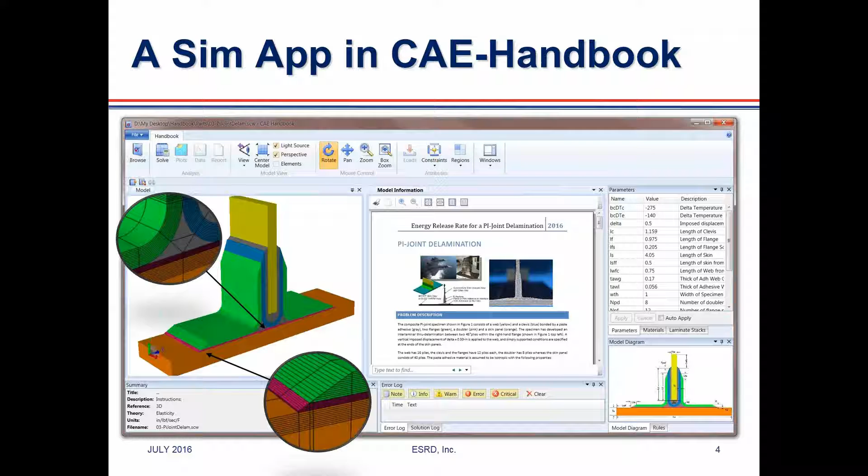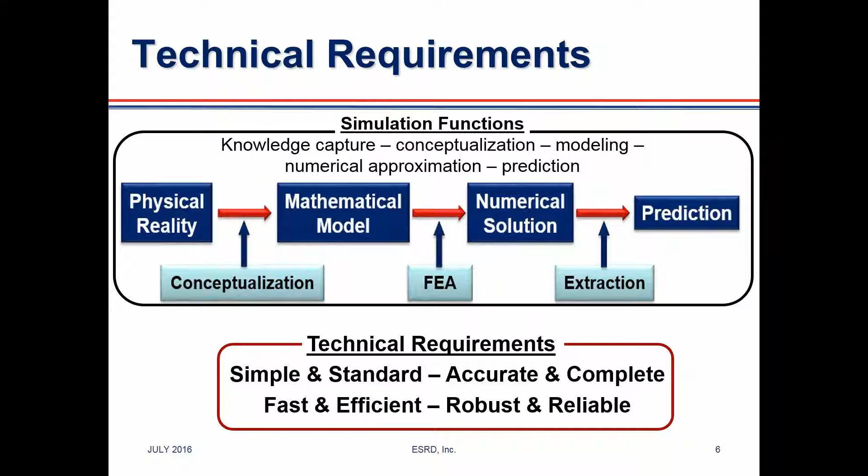This is the foundation, this is the basis of the simulation function, and the technical requirements within the simulation function for simulation apps are that they have to be simple, standard, accurate and complete, fast and efficient, robust and reliable, as we will see in a moment.

Before I can get into those details, I'd like to introduce the definition of simulation governance, which is the exercise of command and control over all aspects of numerical simulation. In short, what we mean is that the procedures of simulation governance include the proper formulation of mathematical models, the adoption of the best available simulation technologies, and, very importantly, data and solution verification. The goal is to enhance and ensure the reliability of prediction based on numerical simulation.

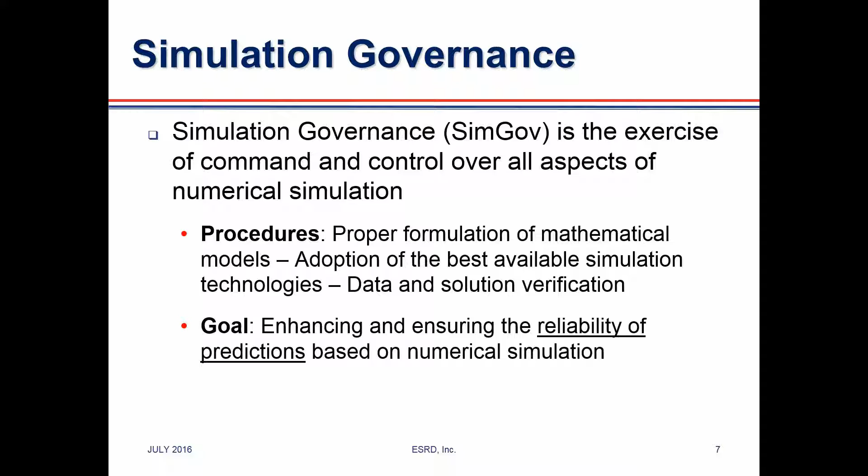It's always expected that when a result of numerical simulation is produced, the reliability should go hand in hand, and that has to be guaranteed by the procedure. In other words, to ensure the level of reliability needed for professional use, simulation apps must incorporate a posteriori estimation of relative error. This is also known as solution verification, which is an essential technical requirement of simulation governance, and we will elaborate a little bit on that shortly.

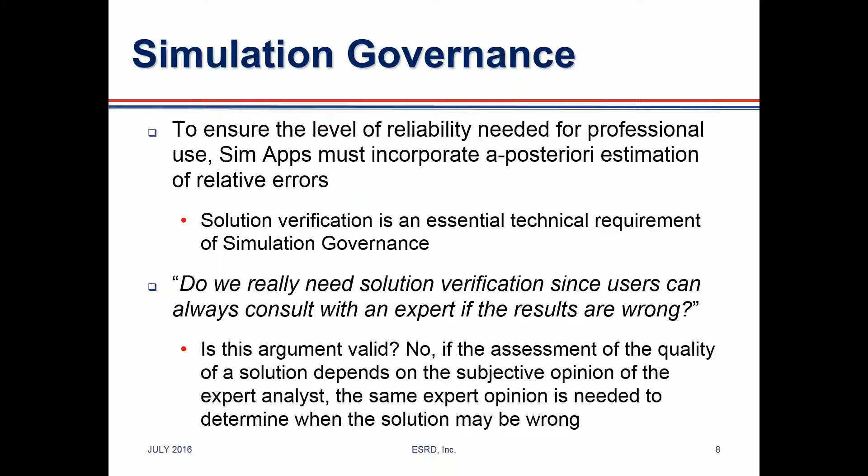Do we really need solution verification, since users can always consult with an expert if the results are wrong? This is a fair question to ask. Is this argument valid? And the answer is no, for the following. If the assessment of the quality of a solution depends on the subjective opinion of the expert analyst, the same expert opinion is needed to determine when the solution may be wrong. The user may not be qualified to make that determination. For that reason, we have to have very strict technical requirements for the development and deployment of smart simulation apps, as we will see now.

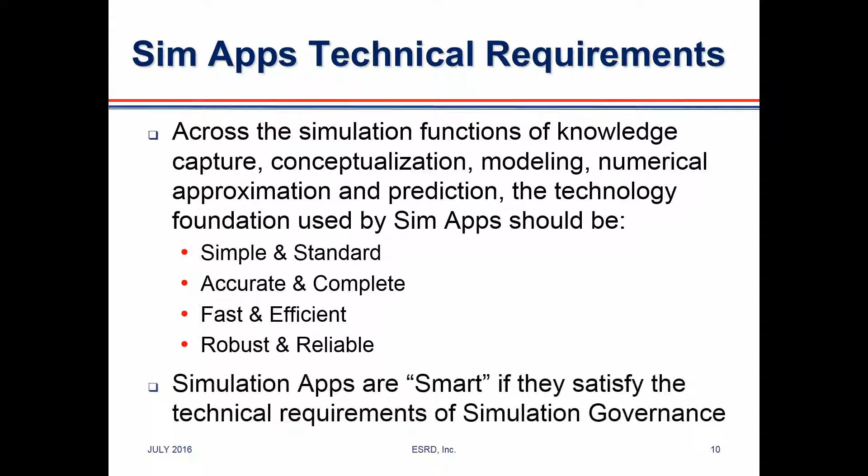Simulation apps: we reviewed the simulation functions, knowledge capture, conceptualization, modeling, numerical approximation, and prediction. This requires that the technology foundation used for simulation apps should be simple and standard, accurate and complete, fast and efficient, robust and reliable. And simulation apps are smart if they satisfy the technical requirements of simulation governance. And we introduced already the concept. Let's now review these technical requirements.

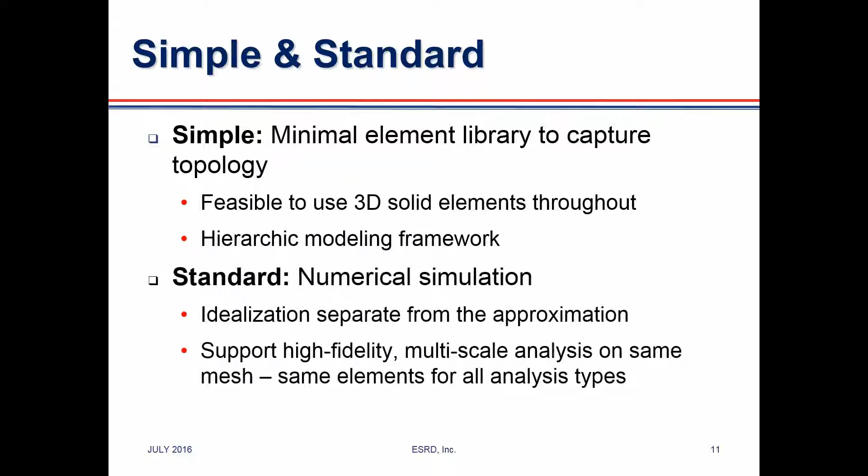By simple, we mean that the supporting technology should provide a minimal element library to capture topology, where it should be feasible to use three-dimensional solid elements throughout, and it should provide a hierarchic modeling framework that facilitates the deployment of these applications. Standard in that we should apply the principles of numerical simulation only, in which the idealization is separate from the approximation, and it must support high fidelity multi-scale analysis on the same mesh. That means that the same element can be used for all analysis types.

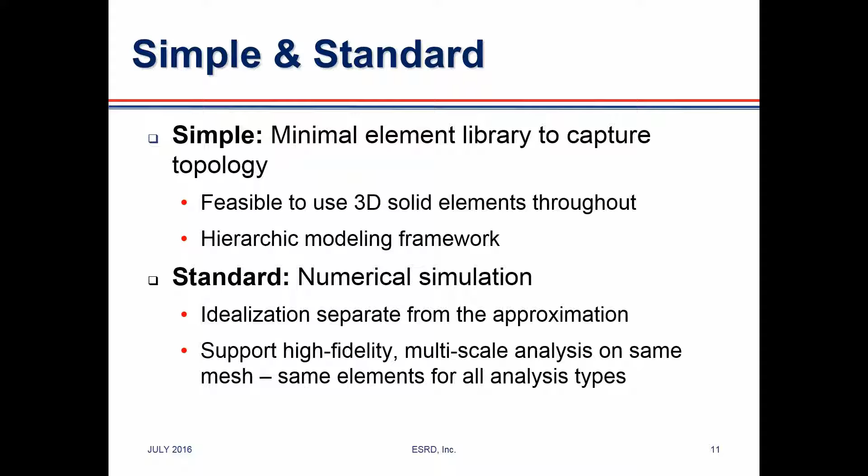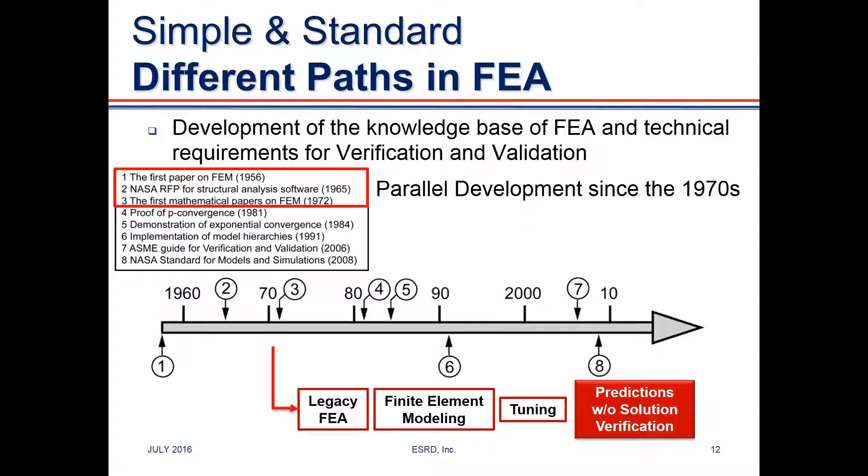The first mathematical papers on the finite element method appeared in the early 1970s. That is what we refer to as the parallel developments in the 1970s. Legacy finite element analysis was introduced in the early 70s. The concept of finite element modeling was introduced. Tuning was considered to be a proper approach to overcome the difficulties associated with the utilization of the finite element method, and predictions were produced without a posteriori solution verification. Basically, this established a process by which only experts can operate in this modality.

A later development, if you look at the timeline on the left, the proof of p-convergence was produced in 1981, and demonstration of the exponential rate of convergence appeared in 1984. So that's why the track of numerical simulation, the proper procedure of numerical simulation, can be traced to around the late 1980s.

That numerical simulation, also from the work done in the 1990s with implementation of model hierarchies, is what is indicated here with hierarchic spaces and hierarchic models, which is the foundation for this numerical simulation approach. And the outcome of that is that the prediction occurred with solution verification.

And this solution verification became really important together with the validation in the early 2000s, and the ASME produced a guide for verification and validation procedures in 2006, and NASA produced some standard for model and simulation in 2008. So when we refer to numerical simulation, we refer to the green track, not to the red track.

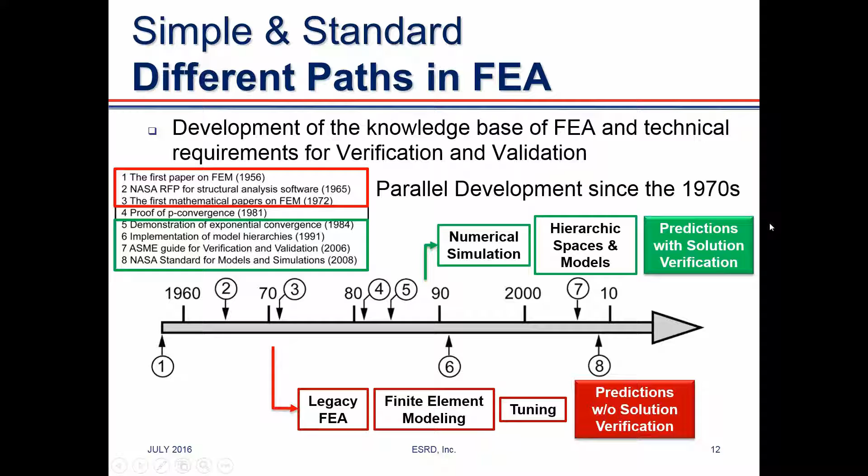Accuracy and completeness means accurate numerical simulation has to be accompanied always with solution verification. Otherwise, the deployment of such application is very dangerous. And that means objective measure of the solution quality every time, not as an a priori activity, but as an a posteriori activity. Every time a solution is produced, there has to be an objective measure of the quality of

the approximation. Feedback when the answer exceeds rules or is wrong, and high resolution results should be possible for low density meshes, so the user, who may not be an expert in finite elements, can rely on the results obtained from the application.

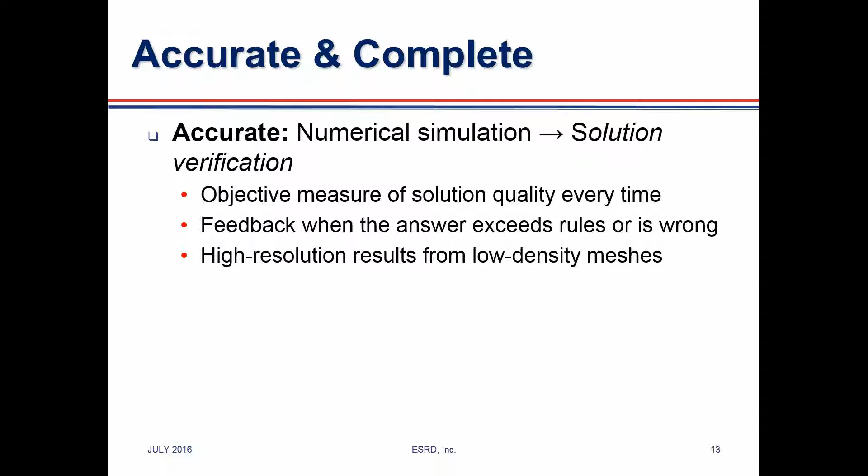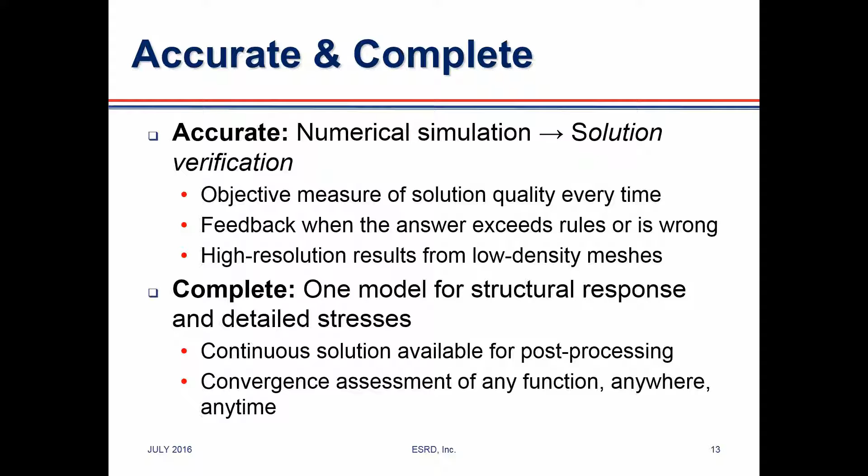Complete in the sense that one model should be enough for a structural response and detailed stress analysis, with continuous solutions available for post-processing, and with convergence assessments of any function, anywhere, and anytime.

In order to illustrate that idea, consider this very simple problem, which is a contact problem, in which a large clevis is contained within a housing of an aircraft, and in this particular case, the goal was to assess the effect of rework on the lip of the housing to determine the influence on the maximum stress that was the characterizing parameter for the fatigue life of the component.

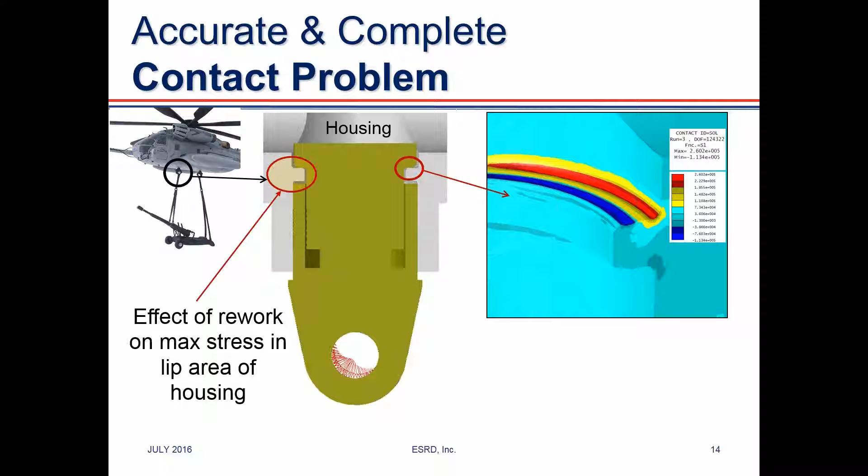Corrosion was detected in this component, and before the repair was initiated, it was decided to do an analysis to verify that after removing the corroded material, the component can take the load and have the proper fatigue life. What you see on the right is a typical finite element analysis result. It is a contour plot with the stress, and what I'm showing here is the mesh that was used in this case.

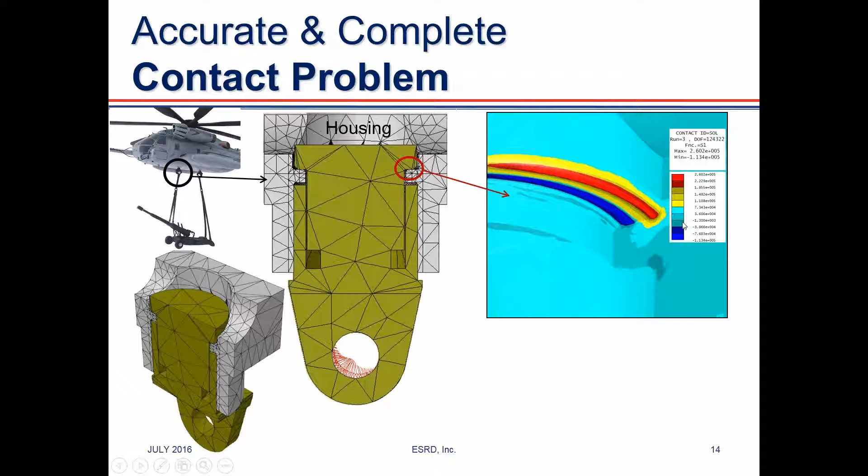On the left corner, you see a three-dimensional cut, and only the symmetric part is shown. The question here is, is this mesh good enough to produce this result? And the answer to that is simply yes, if you have the ability to demonstrate that the quantity of interest, in this case the first principal stress which drives the fatigue life, has converged.

That means as the number of degrees of freedom was increased on a fixed mesh, the results of the analysis show that the first principal stress is convergent to a limit value. And that's what we mean by high resolution results for low density meshes.

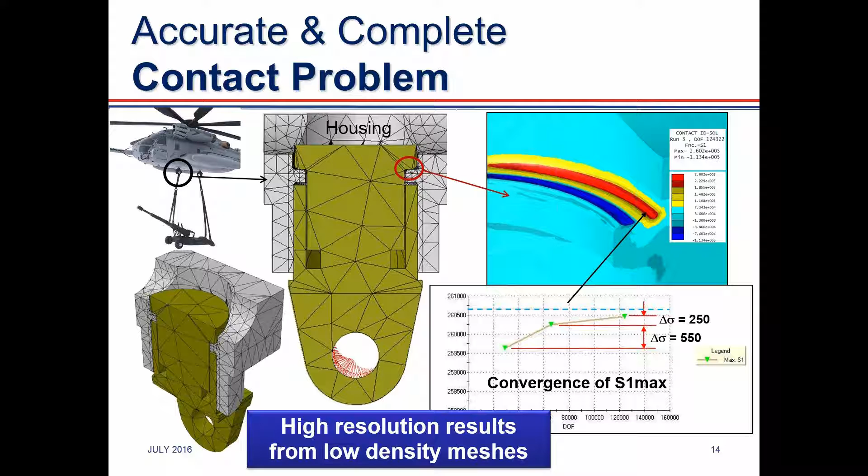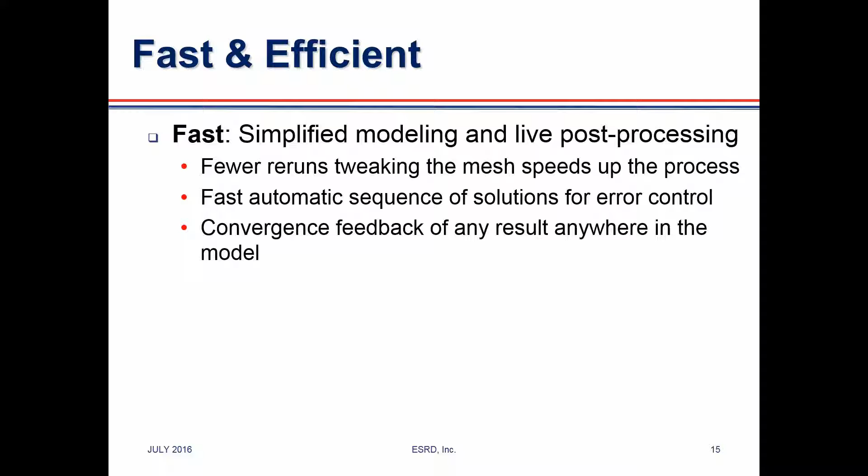That means that once the model is ready to be solved, the computer takes over and the sequence of solutions is produced automatically. This is a fast process, and convergence feedback for any result anywhere in the model can be easily obtained.

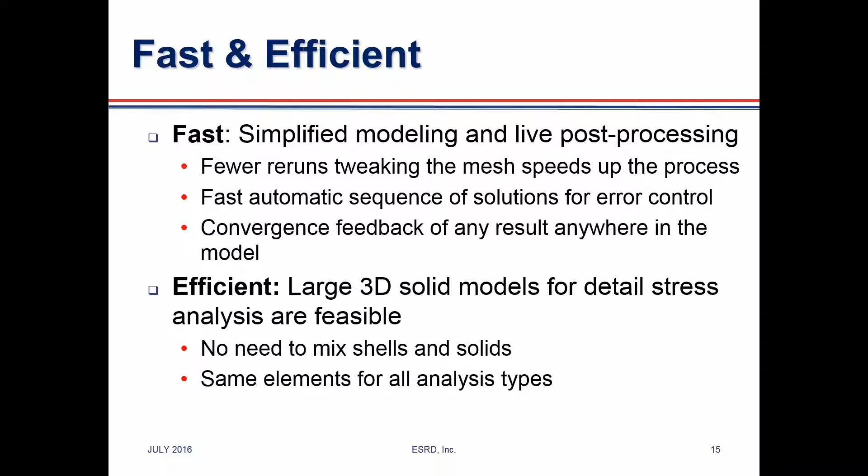Efficient means that large 3D solid models for detailed stress analysis are feasible. No need to mix shell and solid. This is a very common practice in large structural components, but also one that requires a lot of expertise to understand and get it correctly. And same elements, as we mentioned, for any analysis type also contribute to the efficiency of the process.

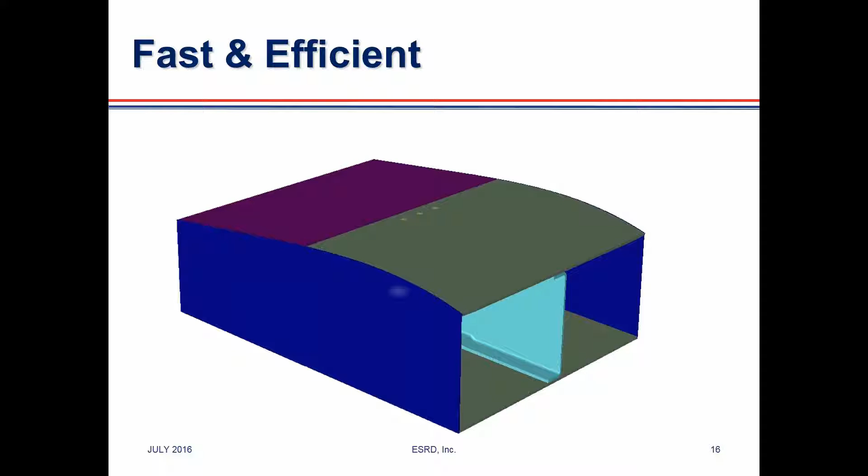What you see here is a typical section of a portion of a wing, and if we look inside at some of the details, one of the problems with this type of structure is the scale issue. You see structural elements that are relatively large and small elements such as fasteners, holes, and when you also want to include the clearance, which is a fraction of the size of the hole, then you can see immediately the scale problem. So how can a model like this be properly analyzed?

On the back side, you see the rib. In this case, the upper skin and the lower skin are bonded to the flange.

This rib is connected to the main spar by means of fasteners that connect the top and bottom skins to the flange of the spar, and by a shear clip that connects the web of the spar to the structure in the back by means of fasteners. There are 5 fasteners on the shear clip, and there are 3 in this case for this detail, 3 fasteners connecting to the main spar. And the similar situation occurs in the front.

One of the complexities of this problem, or the reason we had to develop this particular application, was that engineers wanted to know what is the efficiency of the shear clip in transferring the shear, because the dimensions of these components were such that the traditional calculations were not capable of determining how effective the shear clip was in transferring the shear. And what we were able to demonstrate is that by just changing the level of interference or clearance of the fastener, the shear clip could take from almost the full load to no load at all, which was a big help for the engineers having to make this design decision on this component.

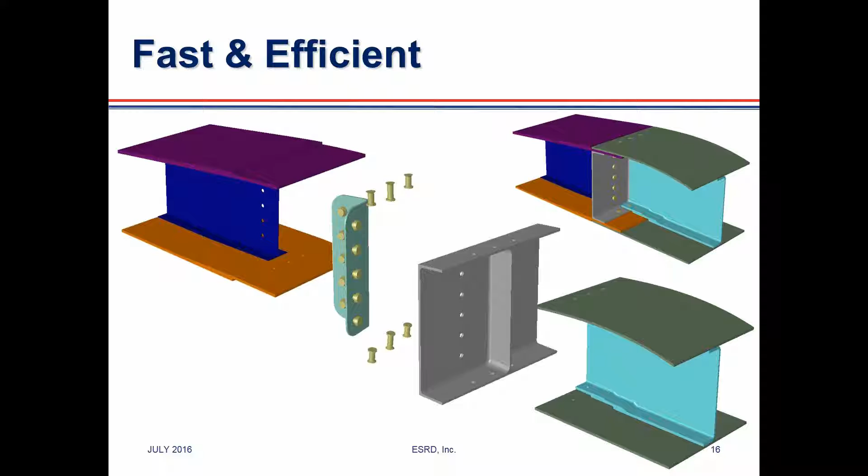And as you can see, now these are the meshes that are used. These are very efficient meshes for 3-dimensional solids, a single element through the thickness of the plate of the component, the thin components, and this is a very challenging problem.

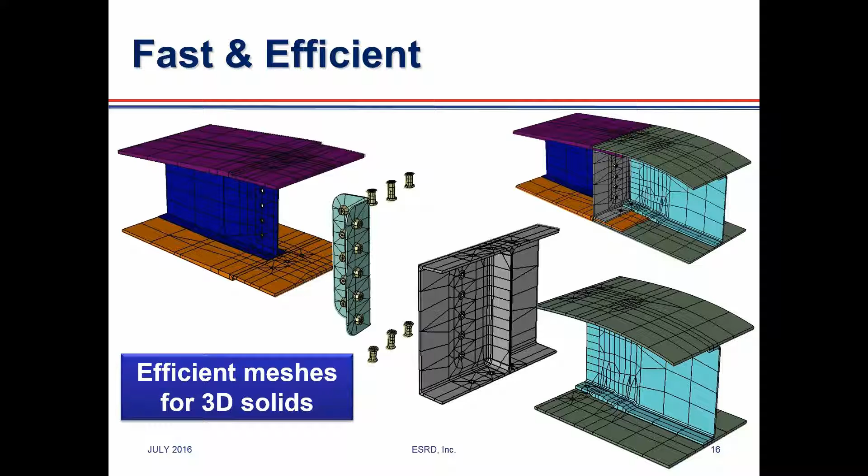Robust and reliable means that it can be used both by a specialist and non-expert alike with confidence, because users receive an objective measure of solution quality without an expert on call.

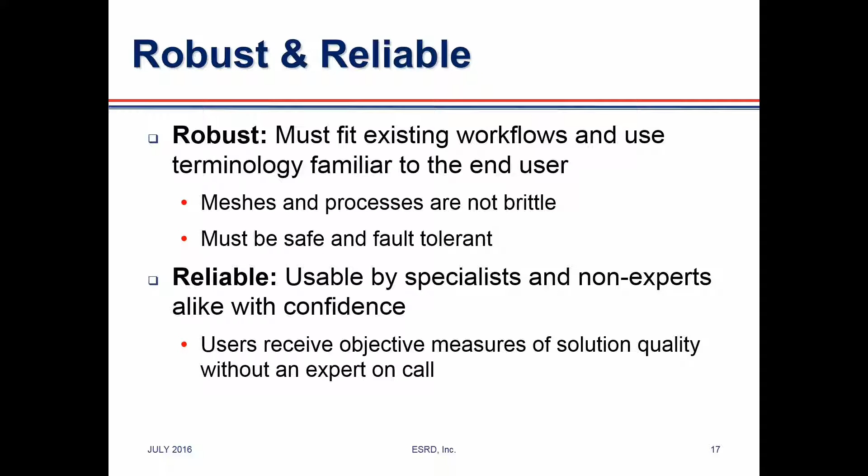As an example, this is an application that ESRD has developed called the CAE-Handbook, and what we see here is a browser that allows the user to select from a library of sim apps the one of interest. Whenever one of the apps is selected, there is a document that explains to the user what is the goal of the analysis, what are expected results, and what are the options for controlling this solution.

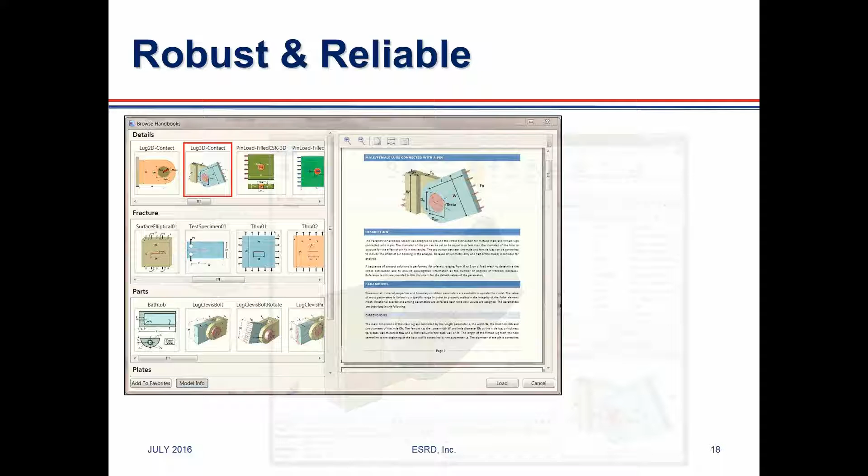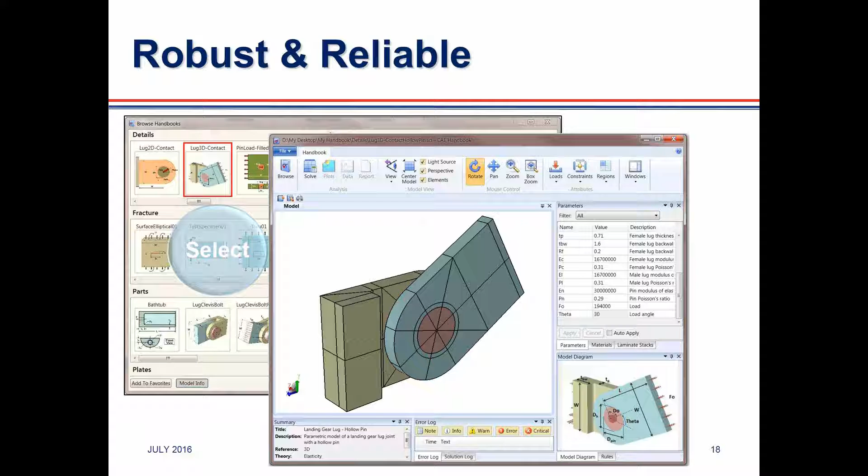And once this is done, the only thing you have to do is to click the Solve button, and when that is done, the solution appears. And what is very important is that the objective measure of quality is available even to a non-expert.

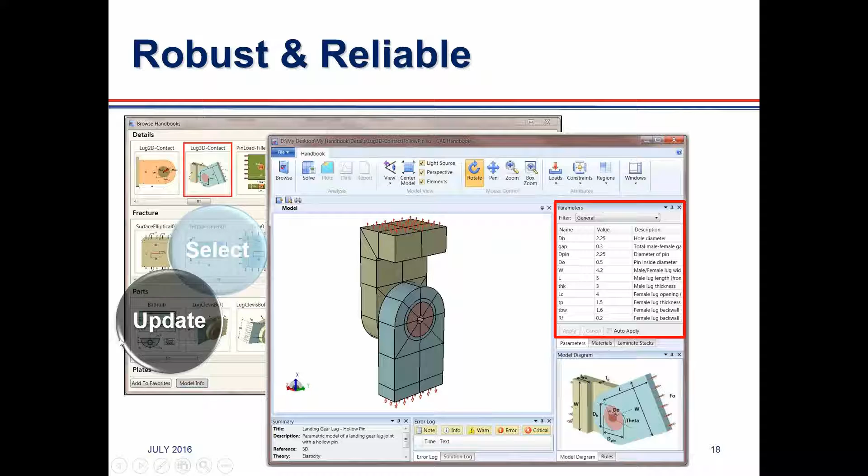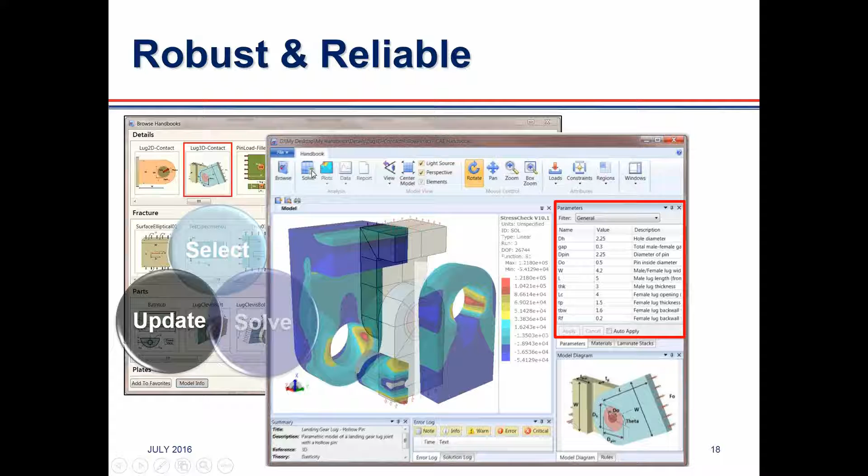So what is the enabling technology behind the development of these apps and the satisfaction of these technical requirements? It is an FEA technology which is based on a hierarchic modeling framework and hierarchic finite element spaces with an extremely simple library where there is no need to search for the right elements, because the elements are only there to provide the topological description of the solution domain.

High fidelity, high resolution solutions are possible on the same mesh, for example, and continuous results are made available throughout the entire model. Using these hierarchic finite element spaces, the quality of the solution is fairly constant throughout the whole domain, which means that the extraction of the results of interest is not limited to some special points in elements as traditional finite elements do.

Post-processing live means that there's a live connection between the GUI and the solution, and the solution is stored in a way that any post-processing that the user needs can be generated on the fly anywhere at any time after the solution was obtained, and there are automatic reports of objective measures of accuracy.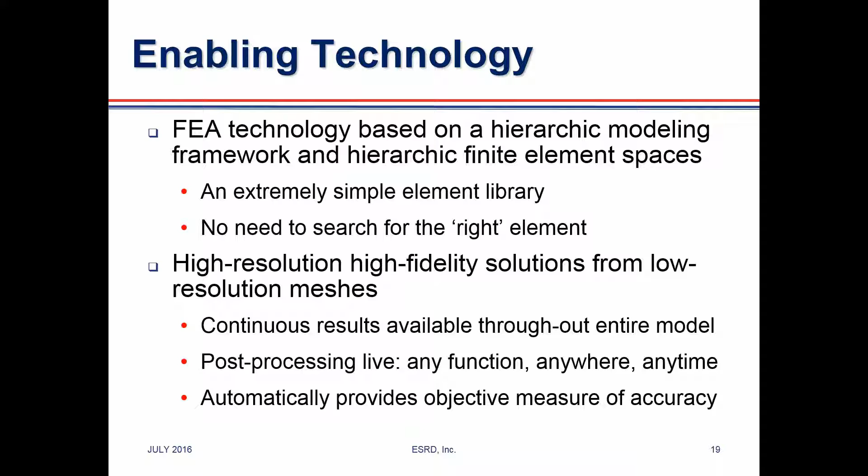Just to give you an idea of problems we have been tackling with this technology that are outside of the reach of traditional finite element implementations. This is an example of a wing of an aircraft. This is a closing rib of a large aircraft, which is shown here on the right. And the objective was to analyze a detail where this fitting interacts or is inserted into the rib.

Just to have an idea of the detail, let me show you the backside of this structure. You see that the fitting is connected with several fasteners, and there are some details here. For example, this represents a seal groove.

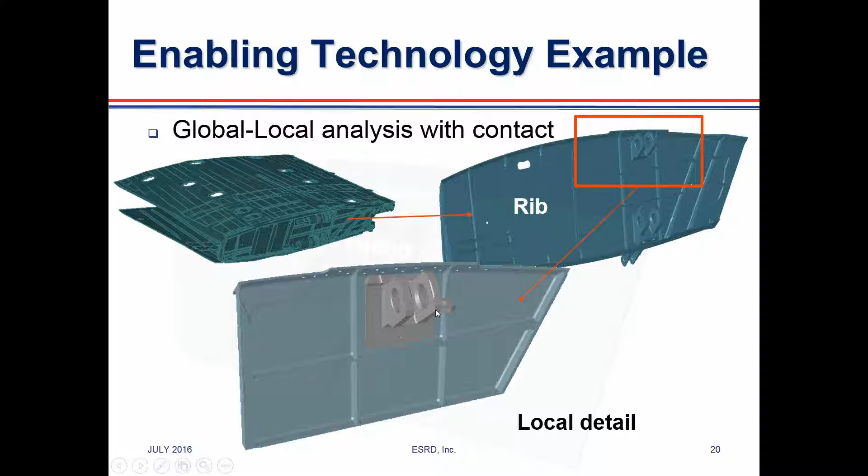That means that, since this fitting is going through the rib, it also has to be perfectly sealed to prevent fuel leak. The problem was that on this back part a crack developed, and they wanted to understand what was the stress distribution before the crack developed and what happened after the crack was introduced.

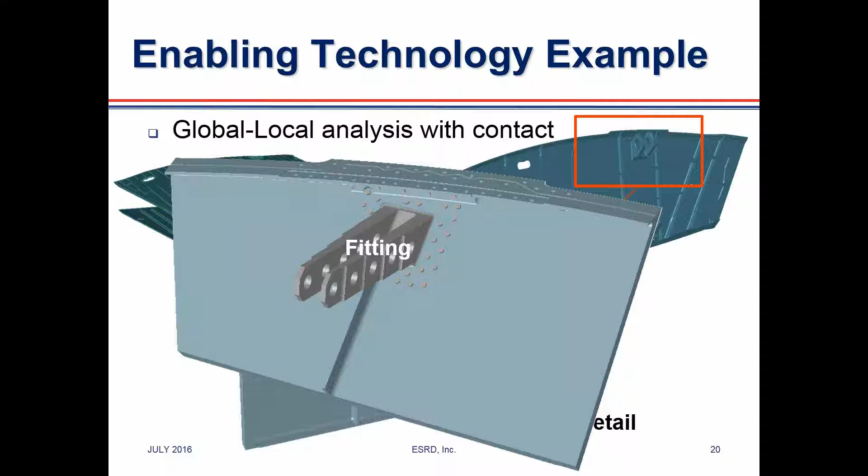It shows an idea of the global-local analysis concept, meaning that the black arrows represent the loads that were brought into the local system by the solution of a global model that represented the complete wing of the aircraft.

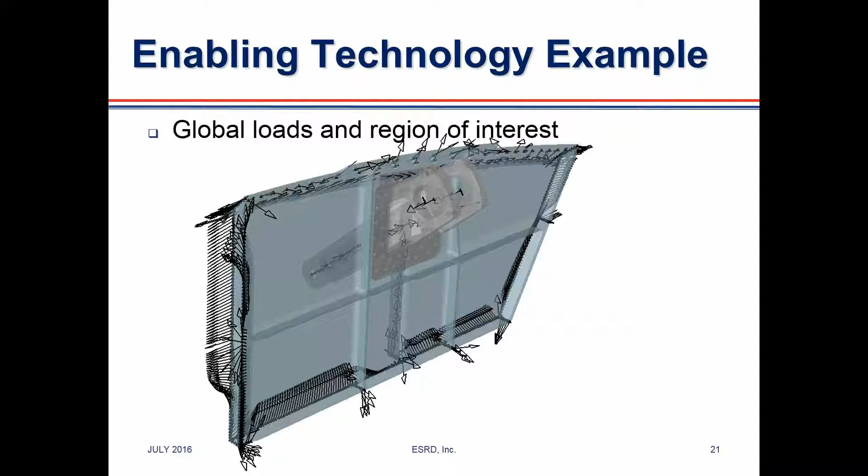Just to show the area of primary interest, removing the fitting: each one of these holes is full with the fastener inside, so a contact solution is required, and the seal groove is on one side of the structure of the rib. You see this is machined from a single piece of material.

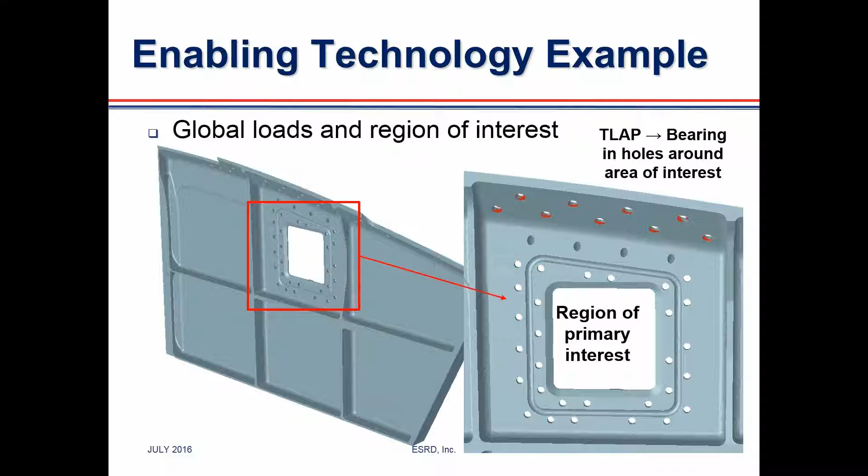The results are shown here. On the left, the figure shows the stress distribution as it comes from the software. There is no smoothing or any other massaging of the data, and that is another measure of the quality. The arrows in this case represent the direction of the principal stress that was required to know where to insert the crack for the follow-up analysis. Just to give you an idea, this is a multi-body contact problem of about 5 million degrees of freedom.

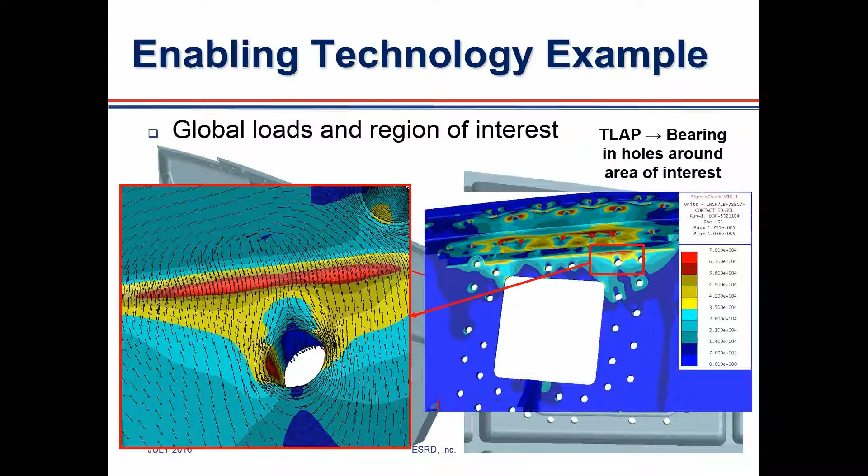So what are the benefits of smart simulation apps? We look at this from the point of view of who is the user. For the specialist analyst, making this class of simulation problem easier to analyze, more accurate and faster to solve, to support increasing complexity of products and demanding design cycles. Also for the specialist, creating a new high-value role to define and author simulation apps across their organization and industry, and in that way creating intellectual property for themselves and for the employer.

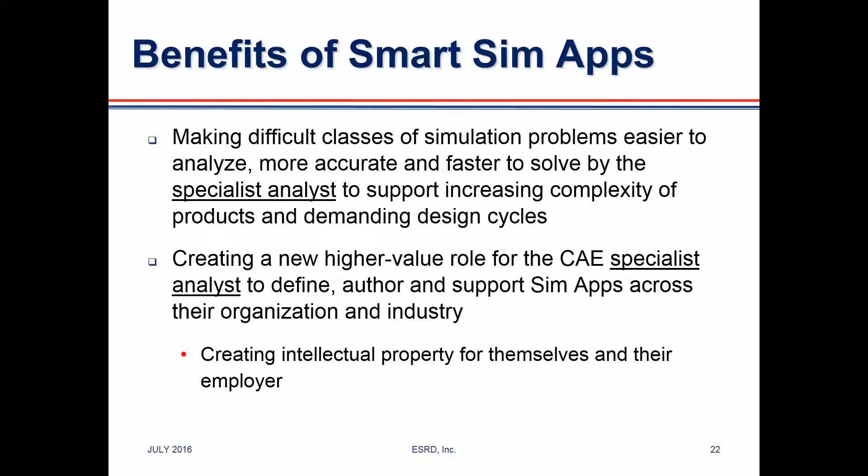In summary, engineering simulation apps provide a framework for the accumulation and preservation of organizational knowledge and standardization and automation of simulation workflows. For specialists and non-experts alike, they fit into existing analysis processes, capture best practices, produce consistent results by approved procedures, remove many sources of errors and judgment, and increase productivity.

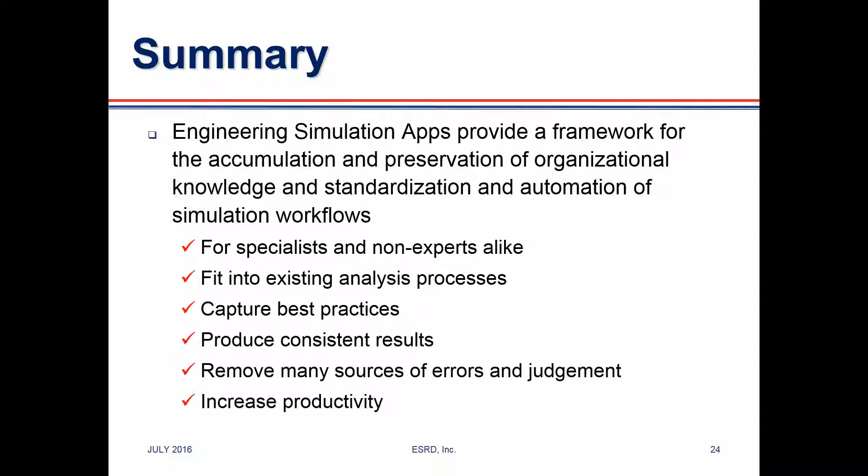Engineering simulation apps, in order to be smart, need to enable simple, accurate, efficient, robust, and reliable simulations with built-in quality assurance. This is a very important aspect. Simulation apps must incorporate solution verification procedures for all reported results, which is an essential technical requirement. Without this, the deployment of simulation apps into the hands of non-experts can be risky, if not negligent. When deployed in this way, smart simulation applications provide many benefits for authors, users, and organizations.